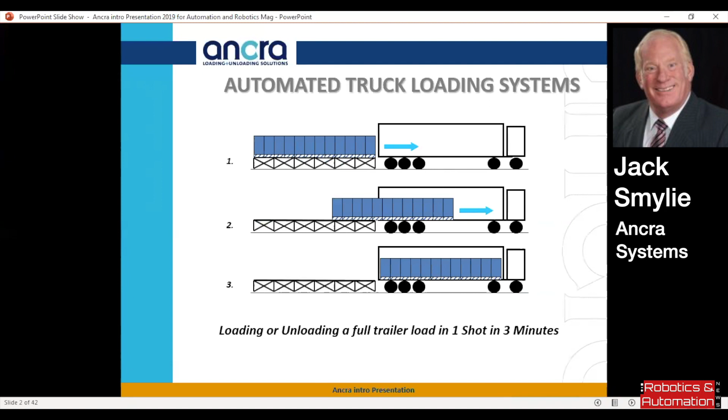This is a little bit about what we're going to talk about. We're just going to tell you very briefly who we are and Heico Companies, who owns us, some experiences in different industries. We'll talk about high volume, the main drivers - when would you want to put in an automatic truck loading system? Overview of all of our different systems, our global partners, and some references. And then I'll give you a couple details on some people that are using our system, of the hundreds that we have.

All right, we're owned by Heico Corporation. Heico is out of the Chicago area, United States. It's a very large company, which gives us the financial wherewithal to handle very, very large projects. Heico is just under $3 billion a year. We're part of what they call the Ancra Group, which is one of 4 groups of the Heico companies. We are part of the group that's primarily around transportation, so we have sister companies that are in different parts of transportation supplies and things such as that.

Who is Ancra? We're based out of the Netherlands, out of Boxtel to be specific, maybe 2 hours outside of Amsterdam. We are the specialists in automatic truck loading - it's all we've done for almost 30 years. We do custom work, mostly engineering work that we do before we build the systems. We kind of engineer and build on a theme. As you'll see, we have different types of systems that can move any type of cargo, be it palletized, slip sheets, unpalletized, metal racks and fixtures, things like that. But every single project that we do is unique in some form or fashion, be it the height of the building or specific customer needs. We've been doing it - we're the experts, we're the technology leaders. We have systems that no one else has. We're the only people, as you'll see as we progress through, that can actually load an unmodified trailer.

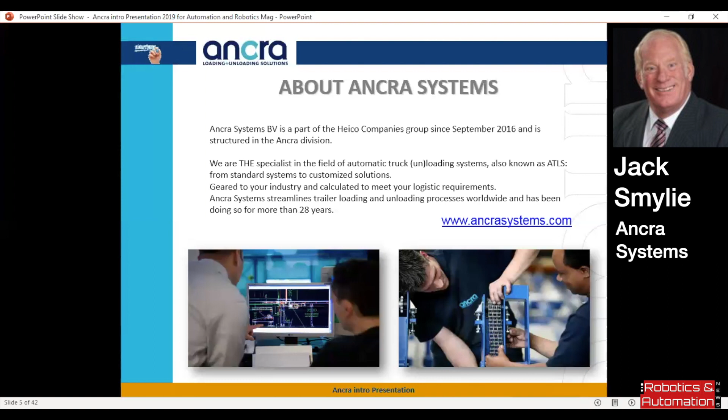100% of our shares are owned by Heico. We do all of our own work - everything's done in-house. We have a multitude of buildings in one area, from engineering to metal fabrication. We even have our own extrusions for our chain runs and things such as that, so everything is custom to our system. We pre-assemble in our buildings, and then we disassemble for shipment to the customer site, be it via truck for someone local in the European theater, or onto containers for elsewhere in the world. Then we send in our own crew to put the systems back together on site, so the system has already been assembled and run before it hits any of our customer sites.

Okay, what are the benefits of this thing? Why would we want to do this? You'll see that volume is the key driver, which we'll talk about in a moment. But really, we can reduce a trailer fleet by at times up to 70%.

Rule of thumb is if you're using 10 trailers to run a shuttle system now. When I say shuttle system, what I mean is if you have a production facility and 80 to 90% or more, or 60%, go to an offsite warehouse, and you're doing this multiple times an hour, that's a shuttle.

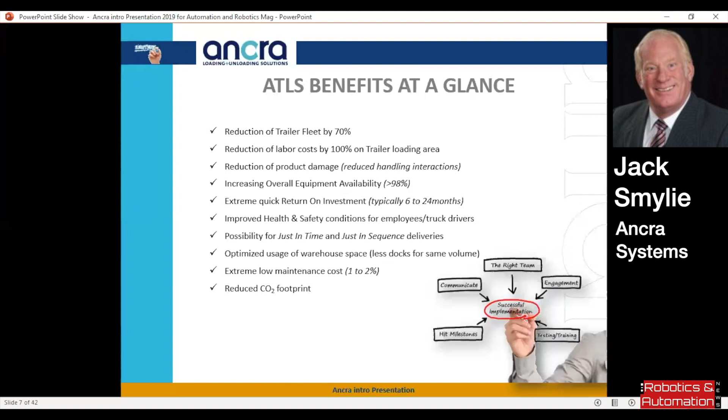I mentioned this earlier, high volume is really the main driver for if you want to get your company into automatic truck loading and unloading. You need, on average, at least 2 truckloads per hour in a shuttle situation to warrant looking into automatic truck loading, because that's where the dollars start to add up, so you can get a very good return on investment.

If you have other reasons for doing it, I'm happy to talk to you. We're happy to talk to you, but it's really driven by volume.

If you look at the top slide, we're talking 30 to 45 minutes, and I hear it's a lot longer than that in the real world at the dock. When this truck's parked and ready to go, he's 4 minutes at the dock, 3 minutes to load, 1 minute to close the door, and he leaves. So you can see how fast and how efficient an automatic truck loading system can be.

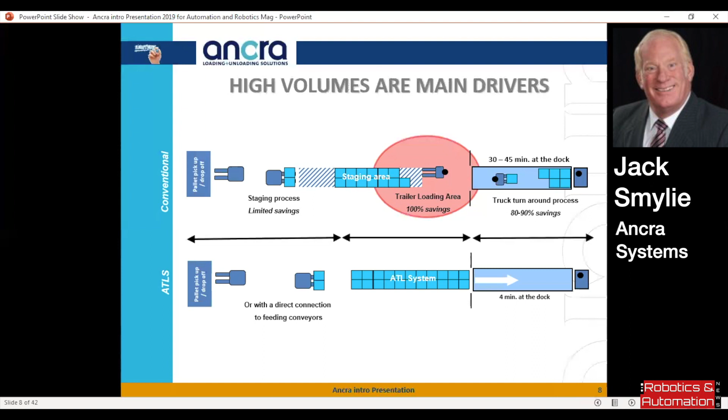Inbound, outbound shuttles - that is the biggest driver, and has been for close to 30 years, of the automatic truck loading industry. If you have a short shuttle, meaning you're only going maybe 10, 15 miles maximum, I have shuttles that are as close as a mile or half a mile.

But there are different systems that you can use. You can use a chain system, a slat system, a belt system. They will load and unload, and it's really great with a trailer, and the trailers need to be modified.

Now we have a longer shuttle. We have some shuttle systems that are running as far as 2 to 3 hours back and forth. Then we suggest a different type of system, and we'll go into each of these in more detail later, that reduces the financial impact on what we have to do to modify the trailer. So it's a much more limited modification, which saves money, and it makes it a much more practical process.

And then this is very unique. We have what's called the SkateLoader. No one else in the world has anything like it. We can load an unmodified trailer, any trailer that pulls into the dock.

This could be an over-the-road trailer, or it could be a shipping container. The system will automatically read the space available, make sure that it's empty, align itself with a full load on it. So it's moving 60,000 pounds or more left and right, up and down, and perfectly aligns itself and rolls itself into a trailer, and then backs out and is removed.

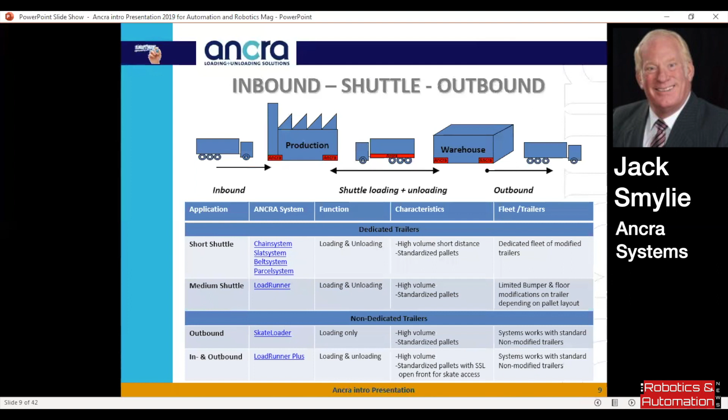We have a similar system called the LoadRunner Plus, which if your customer is using a standardized pallet, uses the same base technology as the SkateLoader, and again, it's one of the only ones in the world that can do an unmodified trailer.

Choosing the right application, I just touched on it. There are different applications, different shipping mediums that require different programs, and it all depends on the individual needs of the customers out there - the manufacturing plants, the warehouses, or the 3PLs or 4PLs.

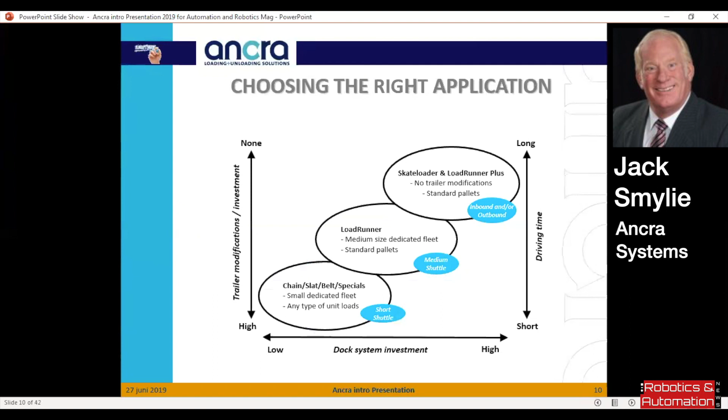Now, what's one of the most important things in cold store is energy use. We want to reduce the loss of cool temperatures from the trailers, the reefers, and keep the temperature cold in the building. When the door on your building and on your trailer is only open 3 minutes, you can imagine how efficient that is for the energy. Plus, it's tremendous for the employees - you don't have employees going on and off the truck. They can get out of the cold temperature sooner, which is better for health and safety.

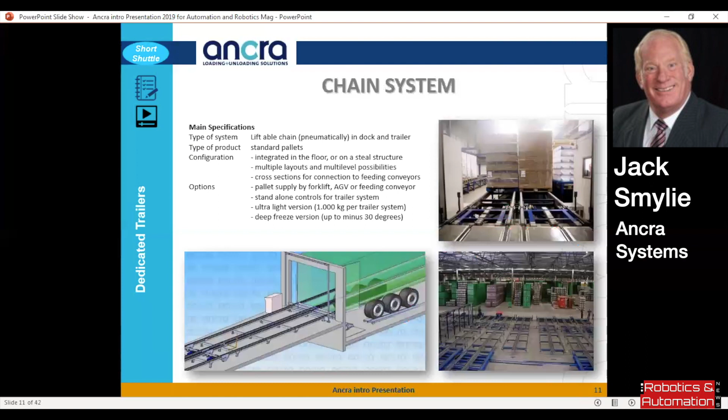So this is actually a 24-hour-a-day distribution center for beverages now. It's one of the largest in Europe, and it just works almost lights out. And lastly, you can just see a simple drawing of what a chain system looks like. You can see the section in the truck, and you can see the section on the dock, and it's just very quick and easy to get the trucks in and out of the plant.

Then we have a slat system. A slat system is used when we have a unique medium that we're shipping, a whole different mix of pallet sizes, slip sheets where there's no pallets, or something like the picture of the tires. There's tires and rolls of paper that we can handle with a slat system.

Imagine the difficulty loading a giant roll of, let's say, tissue paper in raw form, or kraft paper, where they're from 72 inches to maybe 92 inches in width, and they're generally handled with a clamp truck. Well, you can't get the rolls too big because you've got to have room for the clamp truck to open, release the roll, and back out. Besides the fact they're quite heavy, and driving into a truck like you see here - picture it without the dividers - you have to maneuver this clamp truck, which is about the width of the entire truck, open it enough to set the roll down, and then back out.

If you're doing it with one of our slat ATLS systems, you put it on a wide open platform in the dock area. It rolls on automatically, and we only need 1 inch of clearance. What if you have to lift it higher with a fork truck or a clamp truck? You can't do that - you have to reduce the size of what you're shipping.

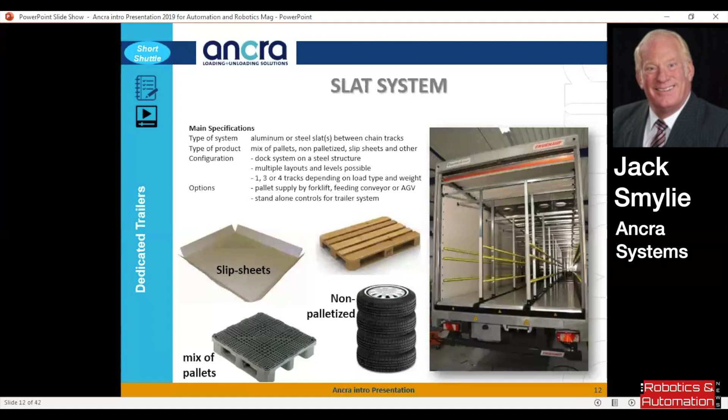Then we have some unique systems. This is a parcel system. We actually were fortunate enough to do the French postal system, and I think also the Belgian system. This is a method using a specialized trailer meeting a specialized system inside, which unloads the loose packages coming in. It could be anything from a large shipping envelope, small shipping envelope, to a small box. We unload them quickly and efficiently, and then they go into the postal systems to be sorted and go out to the businesses and homes.

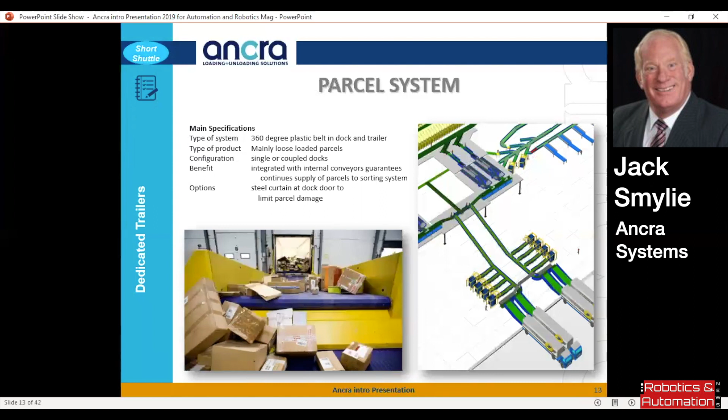This is another type of ATLS. This is the load runner we mentioned earlier. What's different about the load runner - if you look at the lower left-hand picture, you see the blue with the wood floor on top. That's the base of a trailer. There's no automation in the trailer at all, which is why it's less expensive overall for a shuttle system to use this type of load runner versus the chain system, because you're going to have to buy many more trucks when you're having a longer system. What this is - if you see in the foreground, there's arms to the right of the chains that roll on skates, we call them, and they roll into those grooves. The skates lift the load and pull it back, or lower the load and pull themselves out. Again, 3 minutes to load a trailer, just a different method.

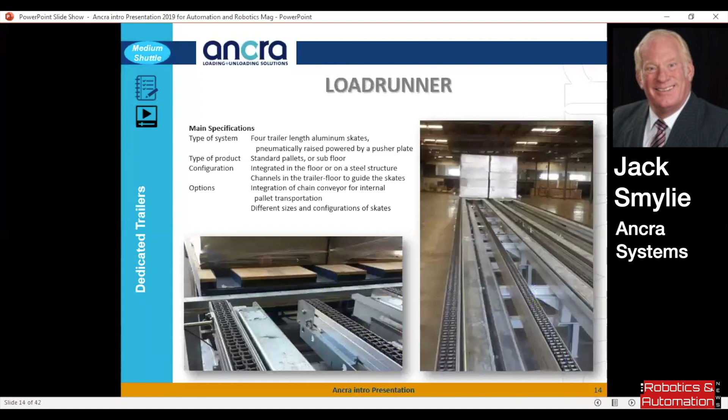And this is the most unique system in the world. This is called the skate loader. The skate loader is the one I mentioned that will load only - it will not unload, but it will load an unmodified trailer or a shipping sea container. In a loading dock situation, you stage your load for the truck or container that's coming in, so it's ready to go on the truck. It's picked, it's been sorted, it's been marked, all ready to go on the truck. With our system, you just stage right on the system, and if you see the dark blue base in the lower right picture, that is the full platform - that is the brains of the skate loader. The skate loader then has sensors for when the trailer or container pulls in.

It scans the entire trailer for height and width, and makes sure that somebody didn't leave a load in there, like one pallet maybe from a previous load. Once it's clear, it adjusts. That entire blue platform moves right and left, up and down, and perfectly aligns itself with the trailer.

If you look at the upper picture, you can see that the black pallets are riding on top of a specialized skate. There are heavy metal wheels underneath there, and they're riding on a chain. The sensors tell that skate when to stop, so far from the bulkhead, and then there's chains on top of the system that push the load forward.

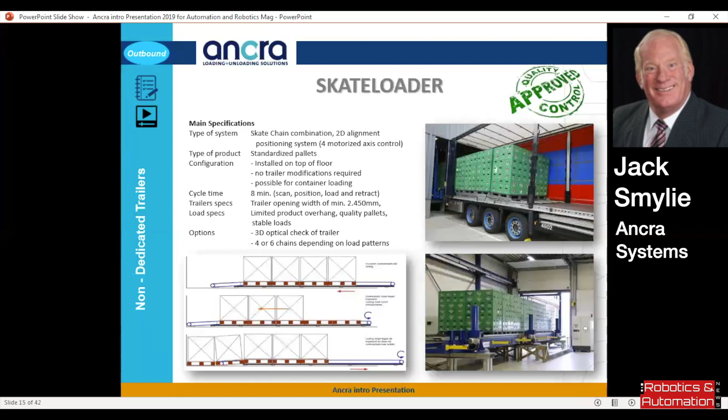The LoadRunner Plus is a version of the skate loader. It just uses a different medium to load the trailer, and it gives us the opportunity to do 2 different levels at one time. Again, it's 8 minutes, unmodified trailer, and it's loaded and the driver's on the road.

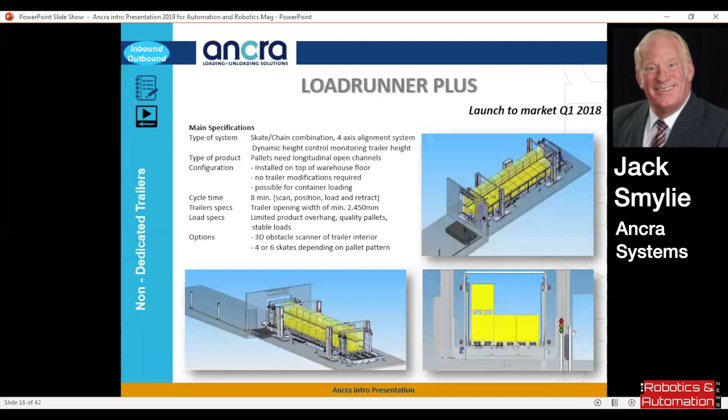What kind of auxiliary equipment do we have to have for our different systems? We have drawbridge sections, and we have a trailer positioning frame. That's part of holding the trailer in the proper position for the shuttle systems so that we don't have a bounce in the trailer.

I'm sure anybody interested in this subject has probably seen a fork truck drive into a trailer on a loading dock, and seen how much that trailer bounces up and down as the fork truck drives in and out. The trailer positioning frames that we use hold the trailer in a steady position so it doesn't move up and down. It also gives you a lower damage rate for your goods.

There are a number of other things here that we do, things that are just necessary. We can do cross sections. We can load from the back. We can load from the right, etc.

The drawbridge section I mentioned, if you see, that's in a cold store application. We use a drawbridge so we get a good positive connection between the trailer and the stationary system inside the building. Because it's in cold store, it's really the only place we use it.

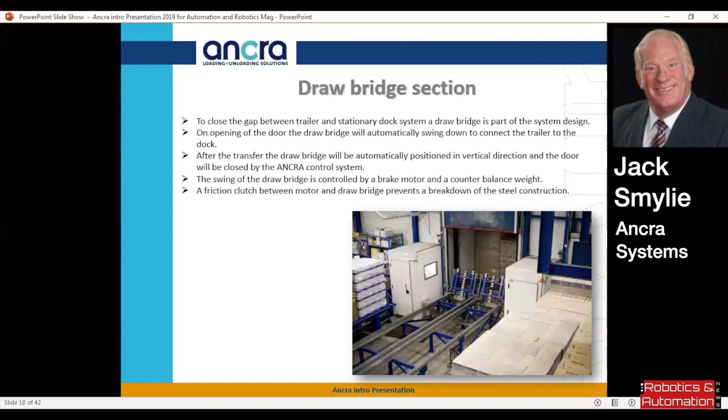It's because there's such a thick wall that we can't get the trailer close enough to interact directly with the stationary system in the building like we do outside of cold store. The drawbridge spans that gap, and it gives us a solid connection so we can have a repeatable load and unload situation.

These are the different types of trailer positioning frames. As you can see, there's minimal disturbance outside of your building.

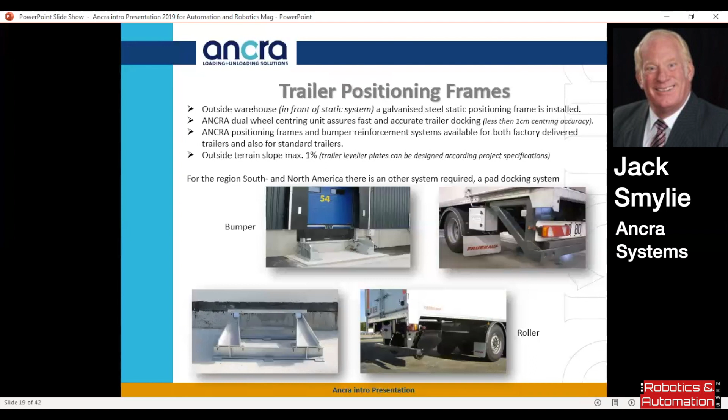Part of our system is a plug. We power the systems that are inside the trailer from building power, but it's a lot more than that. The driver plugs this in because it allows the trailer to talk to the main control panel for our system. Once that's plugged in, the two systems are talking to each other, it's an instant connection, the doors go up, and the system is activated and loads or unloads the trailer.

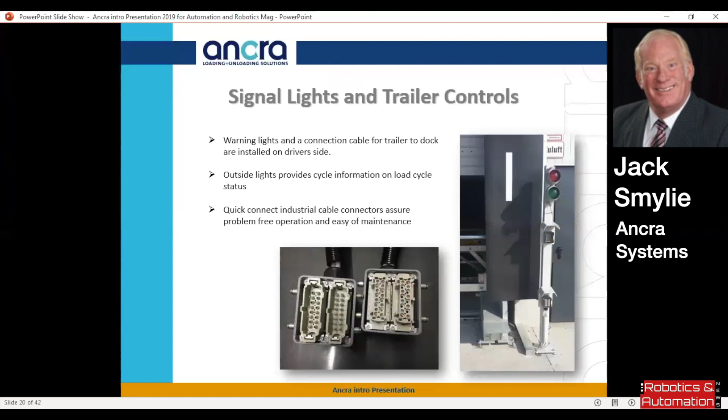We use soft controls. Basically, we use Siemens. We can use Allen Bradley if you're in North America, or really most any type of PLC that you want.

Why we talk about soft, it's because we have a soft start. We don't have a hard jerking motion to our chains or our slats when we go to load or unload a trailer.

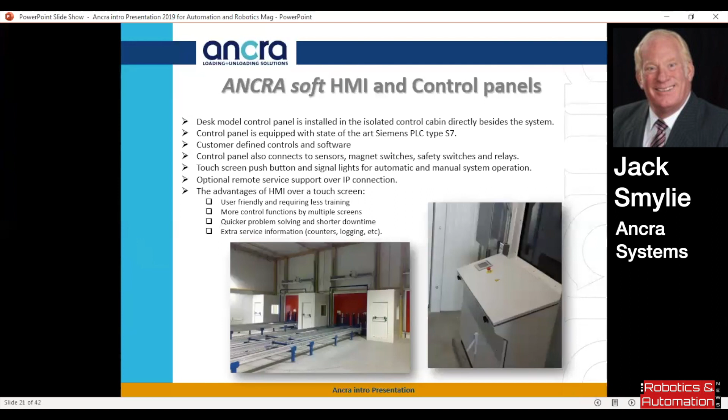Some specialty equipment, some of the very few that we do outside of the direct load, is if you're connecting into an existing conveyor system, most likely it's a single lane. So a cross section or a transfer station allows us to take the two at a time that we're bringing off of our system and put them into individual rows so they can be carried away by an automated conveyor.

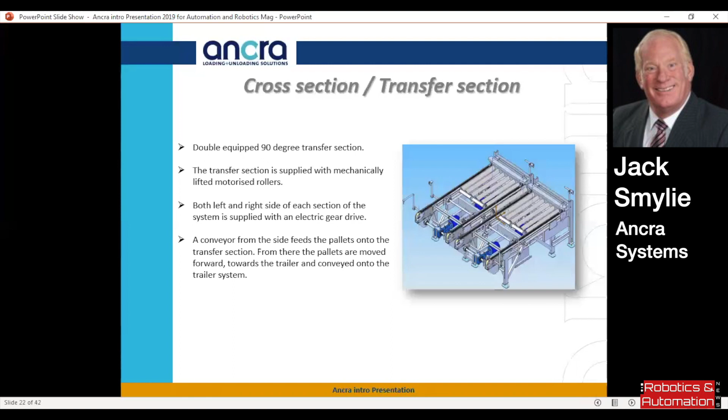We always recommend safety guarding and fencing. Obviously, we don't want people crawling around it. If it gets activated, it's not a real safe situation.

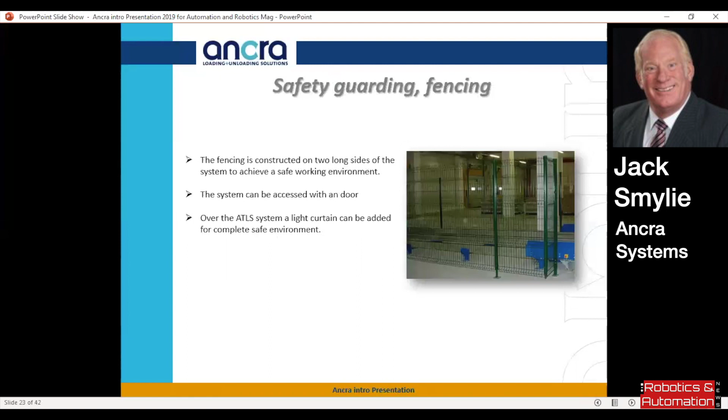Forklift barriers, we're just showing this because we want to make sure everyone understands that we're protecting the equipment. We have about a 99% uptime with our equipment. Very rarely do we have incidents and breakdowns because we do our best to build a hardy machine, something that's protected from fork damage.

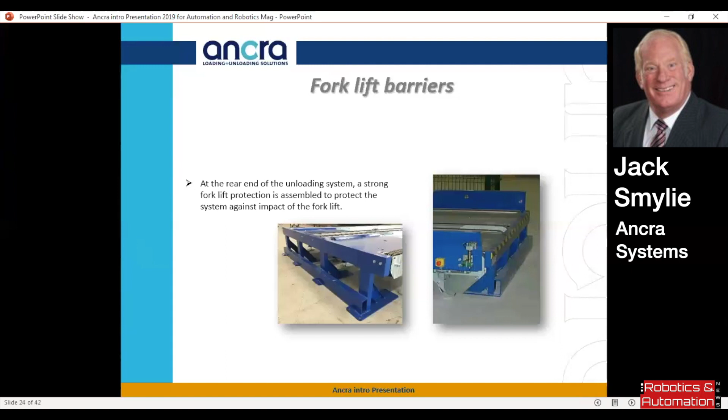What different industries? Beverage industry, you've seen a lot of green boxes. Cold store, we have cold stores all over the world. Petrochemical, from bagged goods to super sacks or big bags. IBCs, a lot of times they're just for outbound shuttles at the end of a line, then it goes to the DC. Automotive: tires, seats, dashboards, skids. We've done some very specialized systems for automotive that are actually two layers in a trailer with dashboards or seats, and it allows them to be sequenced onto the truck in the proper order coming off the truck.

Fast-moving consumer goods, a huge category. That can be anything from snack foods to laundry detergent, and we're working with major companies and small companies all over the world shipping anything from dish soap to potato chips. And then post and parcel. With the advent of internet buying and internet shipping, this has become a growing sector for us because we have the experience of doing automated parcel systems for large post offices.

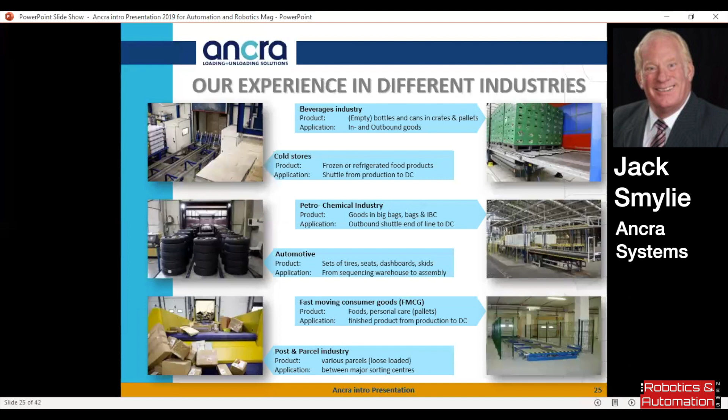Okay, cold store applications. These are just some basic specifics that you can pause the video and read. I'm not going to spend a lot of time talking about it, but it gives you some idea how we converge to center, something to note.

As we load our system, when you're loading it with a fork truck, on the rear of our systems it's two pallet loads wide. You put a pallet on the right, you put a pallet on the left, and then the system automatically indexes to allow space for the next two pallets. So as the system is filling, the chains are converging on each other, tightening the load side to side so you get a nice, tight, dense load going onto the trailer. Then there are connections between the trailer and the stationary system where we tighten the load front to back, so when you're all done the load is as compacted as it can safely be before it ships.

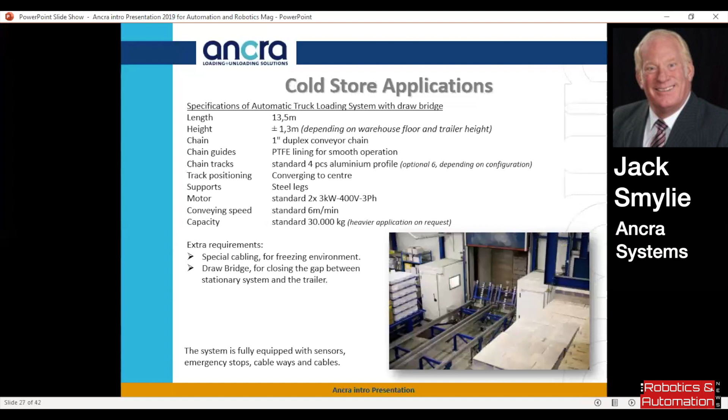Automotive, here's some good examples. If you look at the lower right photograph, that's the end result of our two-story system that puts two layers in a truck. Those are all seats going in from a seat sequencing center to the assembly plant. We've done seats, cockpits, motor blocks, bumpers, air conditioning, doors. If it can go into the truck, it'll go in faster and better with our system.

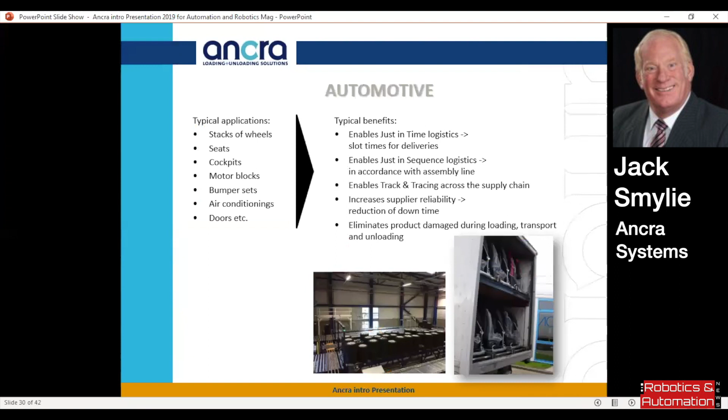Global partners. We work a lot with different systems integrators around the world. They understand what we do and how we do it, and it ties in nicely with the automation they're using, be it an automated freezer warehouse, a picking system, etc. They understand that we're a good, solid partner with strong financial backing with Heico. We can do any size job.

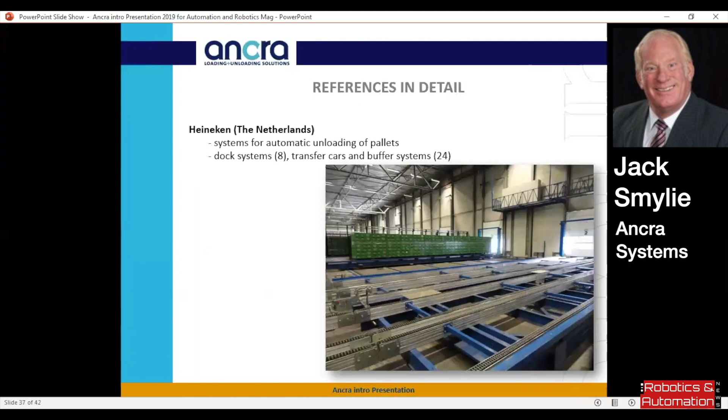This is a company in Brazil that does double layer loading and unloading. Since they have difficulty getting stacked pallets to stay, we just did a 2-layer trailer. It's 4 dock systems and 4 trailers on 2 levels.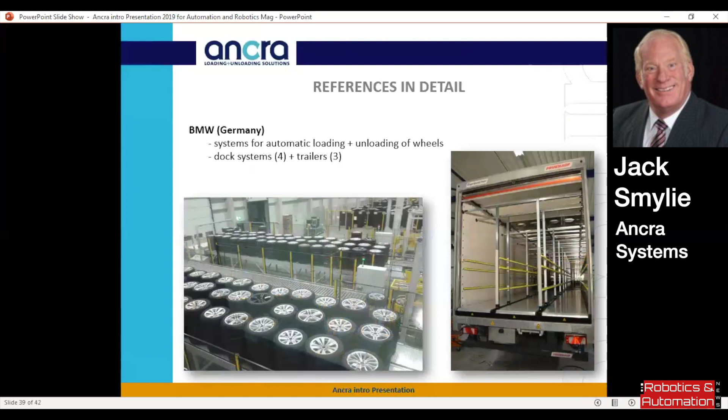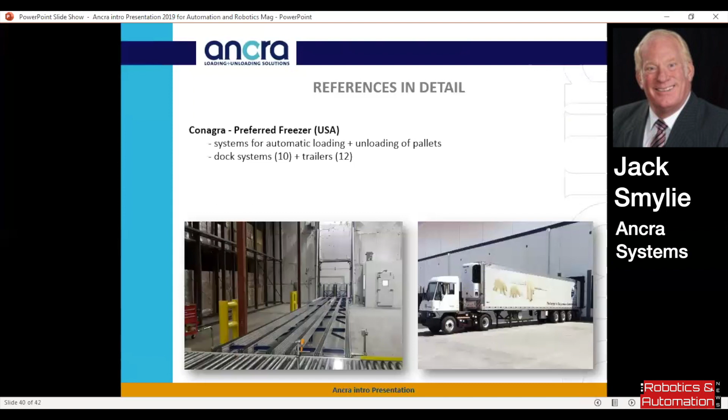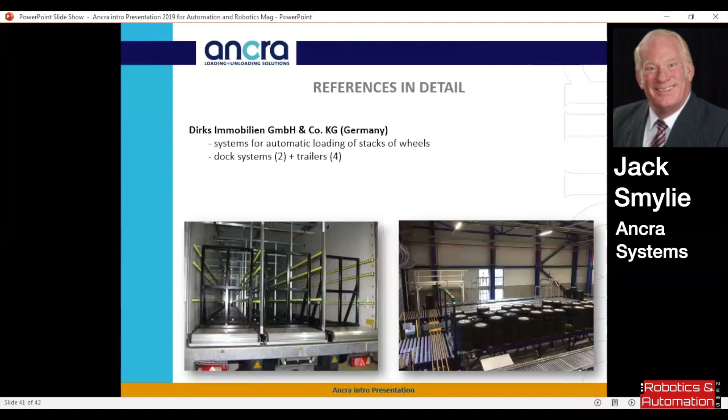And that's what I have. I'd be happy to take questions, and hopefully I didn't miss anything that anyone listening would think was important. Thank you very much, Jack.

That was a great presentation. I had a number of questions which were answered in your presentation, so I'll try and pick out the ones that maybe you could elaborate on.

I actually worked in a warehouse briefly a couple of years ago, and it was truck loading and unloading. The things we loaded and unloaded were those trolleys you see on an airplane when you're a passenger and the steward walks along the aisle with drinks and all that. Those little cabinets, I suppose, with wheels on them - so trolley says it all, exactly, a trolley. These trolleys were stocked by the company I worked for with food and drink, and they'd be loaded onto the trucks. They were kind of smaller trucks, not really sure what the terminology is, but medium-sized, not big 18-wheelers or anything like that.

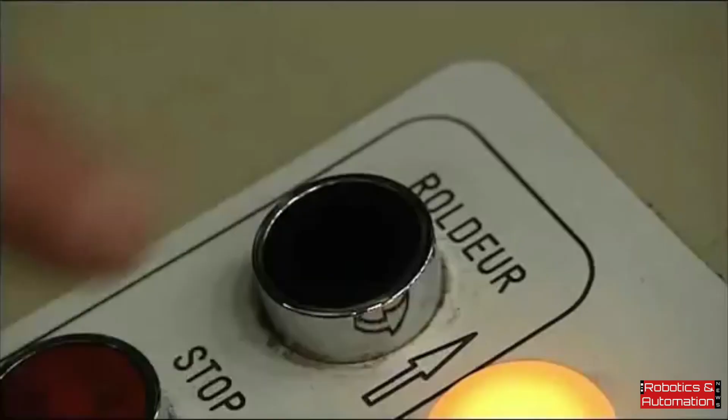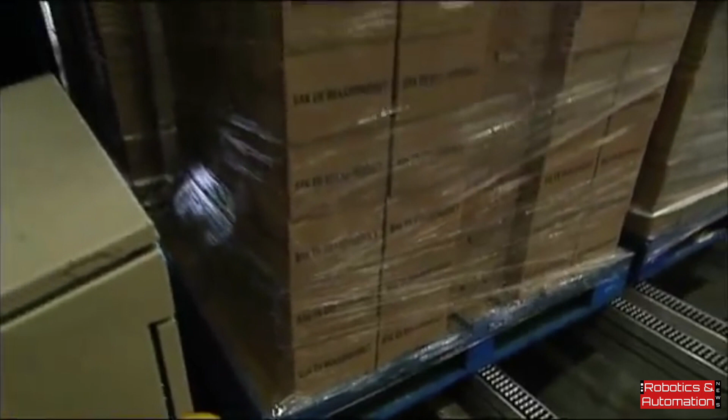They can't hit the side of the wall - they'll damage the product and damage the truck. With ours, it stays in the same position and slides out smoothly. And if they're using a fork truck to unload our system, we index it to the back of the system - generally it comes off the back, but we can do it from the side if there's space limitations. They can pick up one or two pallets at once, and the system indexes itself back to the fork truck. So it's so much smoother and easier than trying to maneuver and drive a 3,000 - 2-ton fork truck between two walls on a roof in and out of a trailer. I hope I answered your question on that.

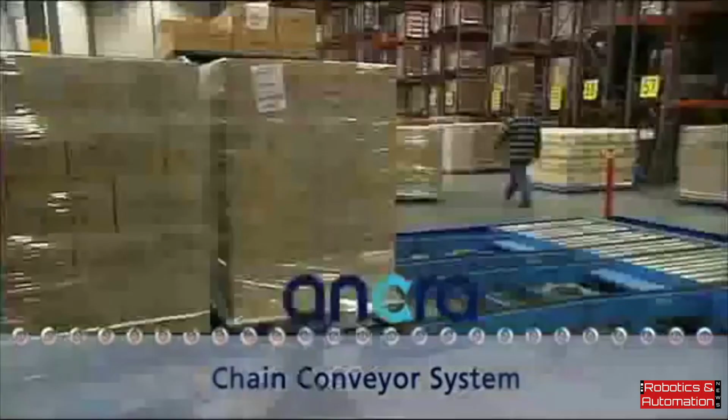Oh yeah, no, I understand what you're talking about, which is a good thing because a lot of this terminology I sometimes struggle with.

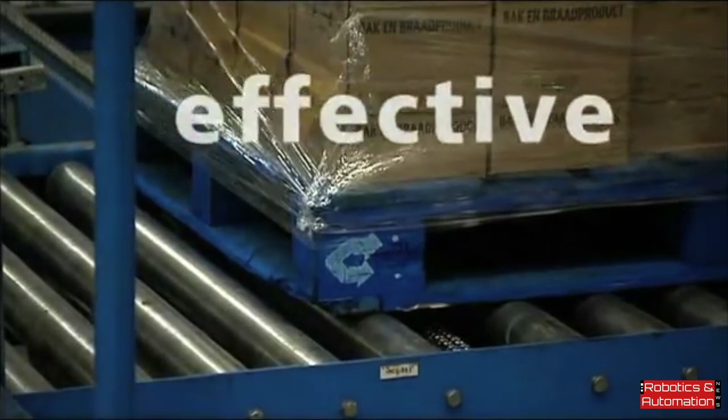I'm glad I had that brief experience in that warehouse, because I was thinking about an interview I recently did where they were talking about the science of maximizing or optimizing the use of the space inside the walls and roof, inside the back of the truck.

If you've got a big load of uniform sized boxes that just fits into the truck nicely and neatly, that's obviously maximizing the space, it's very good. But when you've got different size parcels and boxes, the trolleys I was talking about only really took half the height of the truck. I don't think they ever really needed to fill it more than they needed to. But I can imagine, if their business grows, dividing up that vertical space with another platform so you could use the top half as well and put more trolleys on it. That would make sense for them.

But obviously it can be quite complicated when you're talking about various size parcels and boxes, loading them. How do you do that with the postal company you were talking about? Your system seems designed more for uniform, large things that can fill up the truck quickly in one go.

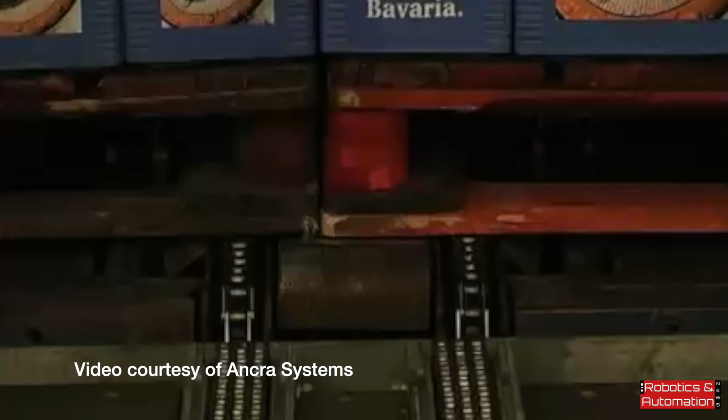As a final question, you mentioned that your company is growing very fast in North America and India. Can you elaborate on that? What's driving it? Is it e-commerce or something else? And what effects do you see on your business from that growth? What do you think is going to change about your company?

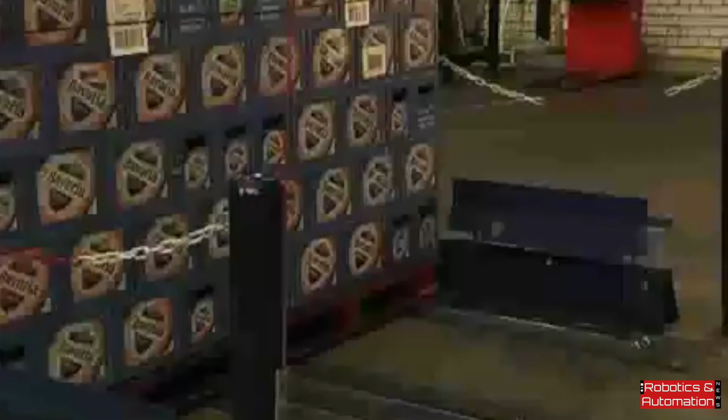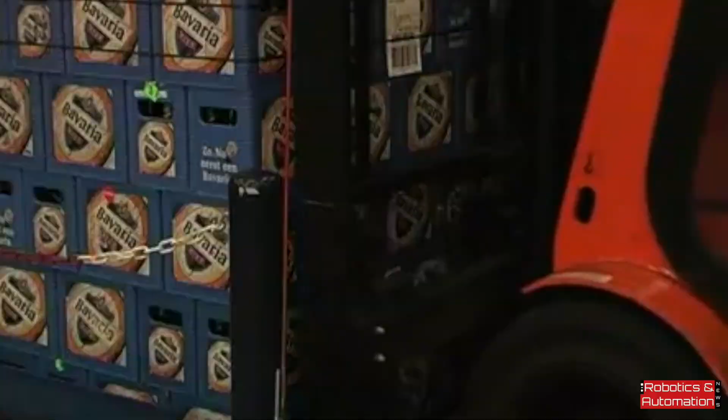I'll speak directly to North America since that's my responsibility. What I found here is that surprisingly, the North American market, Canada, US, Mexico, were not as aware of automatic truck loading systems as Europe was. In Europe, manufacturing or warehouse companies are at least aware and probably know somebody using automatic truck loading systems. I've done a number of trade shows here in North America, and people walk by our booth and don't even know what they're looking at until we explain it to them. Then their eyes kind of grow. But we're growing relatively quickly.

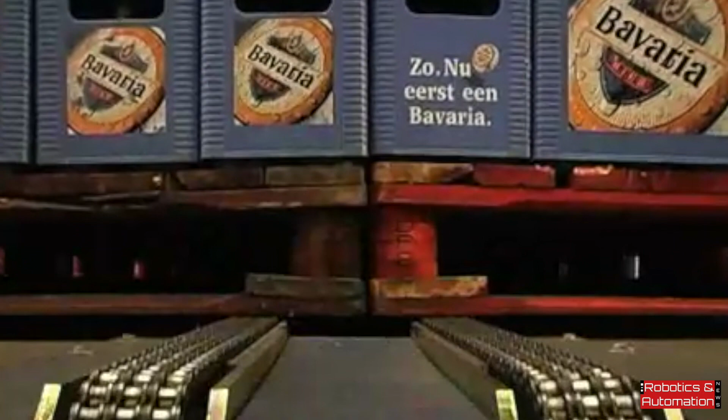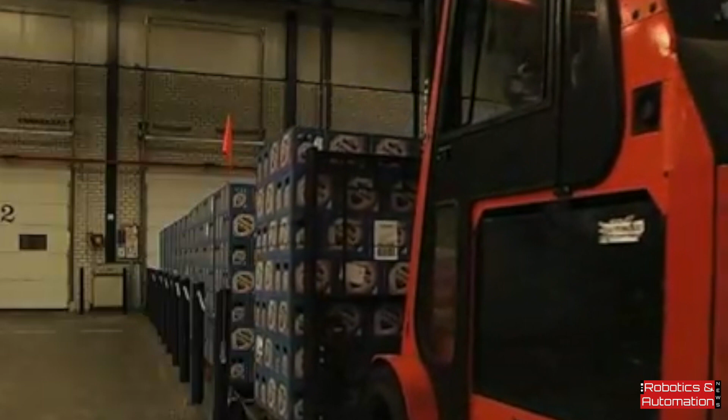We've been marketing here for just over 2 years. We've added several new customers in the United States and Mexico, soon to have systems in Canada. This August, we're going to have installation crews in — one in Mexico, and three crews in the US, just in the month of August itself. You have to remember this is a 6-month build, so if you gave me the order today, my crew would be installing it in 6 months.

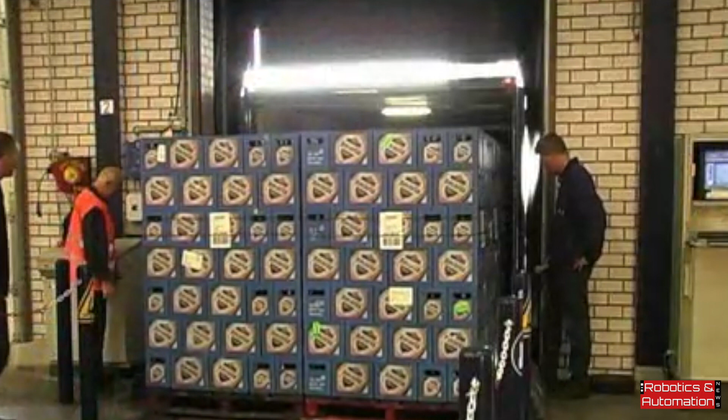So we're growing quickly here, and people are seeing that it's difficult to hire CDL drivers — that's what certified truck drivers are called in the States. There aren't as many as there used to be, and the average age is growing. The majority of truck drivers now are baby boomers, so they're going to be retiring. Then you look at the efficiencies, cost, and environmental effects of having a lot of trucks on the road. If I can cut it by 50%, we're saving the environment. But really, to those of us in business, the most important thing is we're cutting costs and being more efficient. That's what ATLS does for you.

In the right situations, with the right volume, we can prevent adding on to a building because we can do more work out of one door. We can reduce your truck fleet, and you can use the drivers already on your payroll on different routes or doing different things. So you can get them back out on the road and not have to go out looking for people to hire. There are so many reasons behind it.

The skate loader, the first one was built in 2016, so it's a new innovation that people are learning about, even those who knew about ATLS. Loading an unmodified trailer or container, you want to get your stuff out fast. If you're in a warehouse situation with health and beauty, or loading big box stores, or in the produce business shipping from California down to South America or across the Pacific, you want to get that produce from your processing plant into the container and out the door as quickly as possible so it gets to your customer as fresh as possible. Here's another way to do it, because this machine will work 24/7 and continually load those containers so they can be wheeled to the port and sent on their way.